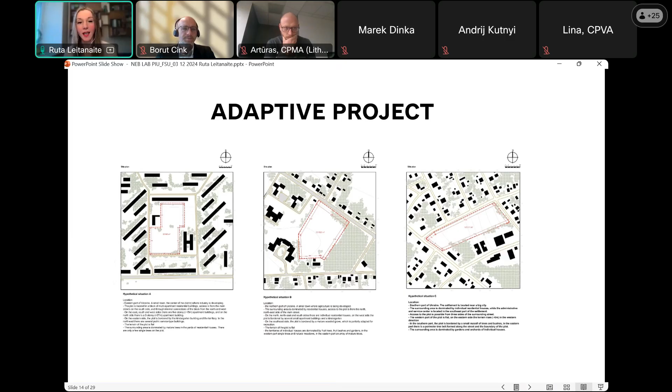We thought of a new concept, which is an adaptive project. What does adaptive project mean? It's a project of architectural spaces and construction that has its own identity and its own solutions, but it could be adapted according to the local urban context, the local natural context, and community needs. In the competition, we asked each participant to come up with solutions for 3 theoretical plots in Ukraine so that we could see how those systems could adapt. And we got those solutions. The architects had really good imagination, and some of the projects were perfectly transformable.

The third challenge is mostly related to the European Union legislative basis, which is public procurement. This competition was to be announced as a public procurement, and we had certain challenges organizing an architectural competition while selecting the best work according to architectural and quality criteria. So we managed that too.

Last week, we had the awards for Most Efficient Public Procurement in Lithuania, organized by the Ministry of Economy and Innovation, and our project was awarded the winner in the category of Smartest Public Procurement. This is, I have to say, the first time an architectural competition is acknowledged by bureaucrats. So when architects say it's not possible to combine public procurement with an architectural competition, I would say - but there was one case awarded.

So now diving into the competition, we announced the Open International Architectural Competition with top 3 projects awarded, and the winner received a contract to design the technical design. As for the inclusion of Ukrainians in this stage, we had a requirement that each team in the competition had to have at least one architect with the right to provide architectural service in Ukraine, and at least one architect with the right to provide architectural service abroad.

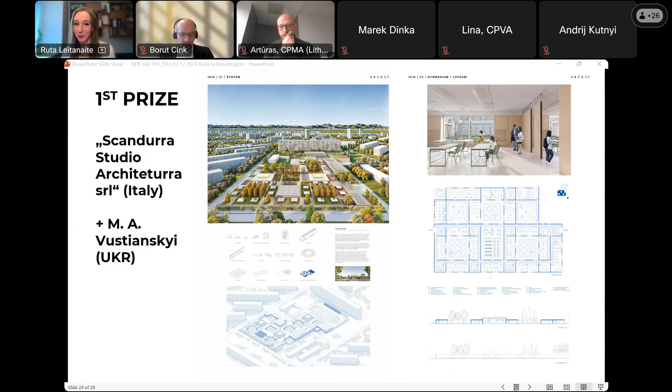So today we will get three presentations from the first prize winners. You will get that in detail, so I will not linger on it - just show you some pictures of how they look.

So what's next? The contract is already signed with the winners. We expect to get the technical design in spring 2025. And as you may know, a huge Ukraine recovery conference will happen in Rome in 2025, so we hope for some promises to be made regarding the implementation of this pilot project as well. Just for you to get the idea where we are now.

This is the scheme that my colleague, architect Rokas Kaičiauskas, who was writing the competition brief, drafted for this initiative. The competition ended, the contract is signed, and we are here where the red line is. There's still a way to go until the implementation. So we just passed the ball to our colleagues at Central Project Management Agency.

Good luck with finding donors. We will do everything to spread the news, not only about the first prize, but also about the second and third prize. Hopefully this project gets implemented until 2026. So thank you a lot for the time. And now I pass the word back to Borut.

Thank you very much, Ruta, for this very concise and succinct overview of first the idea and then the implementation of the project. The next session we planned together with Ruta to give also the voice to national authorities and the European Commission, who are either directly involved in the implementation of the project or are accompanying it. So I would like to invite first Artūras Žarnovskis, Co-Create Future of Ukraine Program Manager at Central Project Management Agency of Lithuania, to take the floor and reflect on this past experience. Artūras, you were also very much involved in day-to-day activities, so we are super interested to hear how the project turned out from your personal view and the view of the Lithuanian government and other institutions.

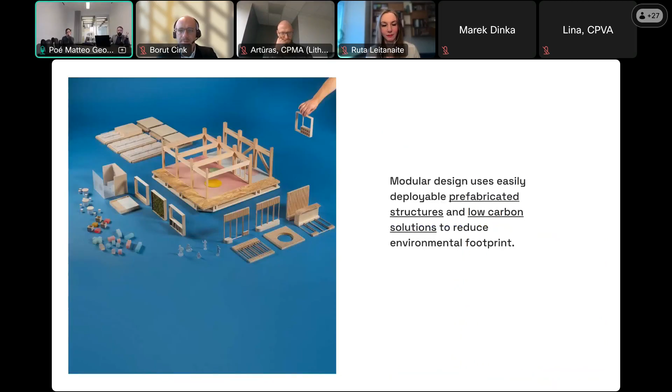The system is a flexible, prefabricated, load-bearing wall system that can be arranged in different ways. Every unit is energetically autonomous, which helps with low-carbon approaches to reduce the footprint of the building itself. So we can resume three main concepts in the project: flexibility, sense of community, and sustainability.

This is a bird's-eye view of the project, and now I will go a little deeper into the description of how the system was thought out.

When we started to think about the project, the first thing was the analysis, and one of the main ideas of the competition was to build schools all over Ukraine. So the first thing to understand was the best transportation means to build the school. We found that the best way was to use common lorries, so we thought about the basic element of the project, the prefabricated wall, being a module sized to optimize the space used in a common lorry.

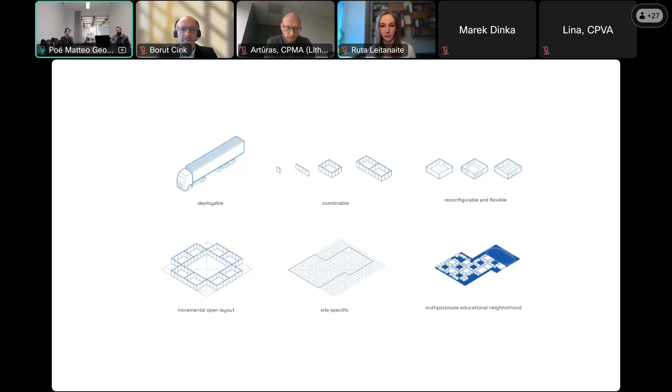These walls are assembled into single units, the classrooms, and these classrooms are arranged around a void, forming a courtyard. This way we have a system, and then the system is spread all over the plot, following a grid of rules, both programmatical and humanistic, because we want to create these relational spaces that are very important for our project. So this is the result on the land plot.

And as was mentioned, we were asked to test our project on other sites, and these are the two other sites that we were asked to develop.

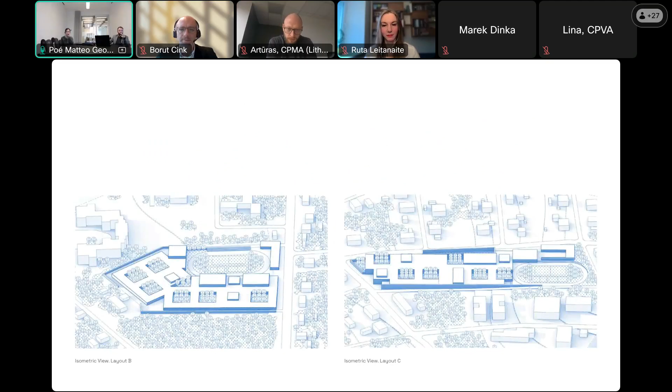When we started to design the building, actually we started to design the void, because we don't see the void as a mere interstice between buildings, but as something that can bring value to the project. The void is the key element that helps create an environment promoting learning, well-being, and social interaction.

The courtyards and the gardens, the recreational areas, are true spatial aggregators that make it possible for students to stay together. They are places of experience, places of nature, places of wonder, and places of learning.

The transparent layout of the building towards these courtyards helps natural light and natural air come in. This helps in creating mental and physical health, improving attention, focus, and cognitive ability, and it also helps synchronize the body's internal clock.

This is why when we thought about the artificial light, we used a DALI system, which is self-regulating depending on the brightness of the natural light on one hand, but on the other hand it changes its temperature depending on the rise and fall of the daylight, in order to keep our body synchronized with the circadian rhythms.

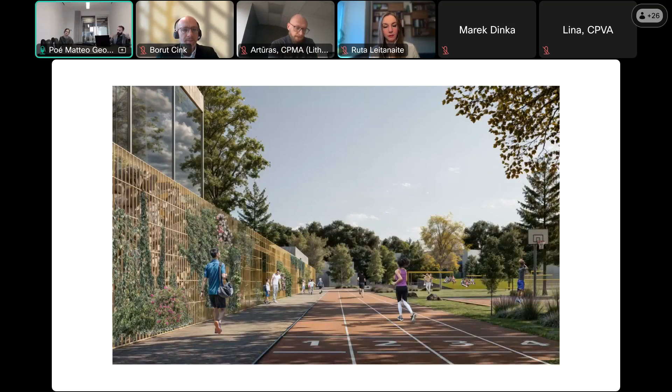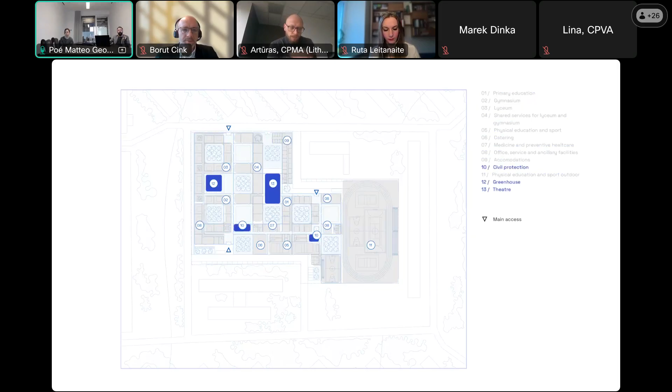We also had a program, and I'll go through it quickly because we have quite common school functions. But what's interesting for us is how all these functions actually face the courtyards, relating to each other and creating this connection between people and all the users in the schools. The result is a very porous plan where people can move and meet freely.

The same was true for the fluxes. We differentiated the fluxes at the entrance, but once you are inside, fluxes and people can actually meet and interact.

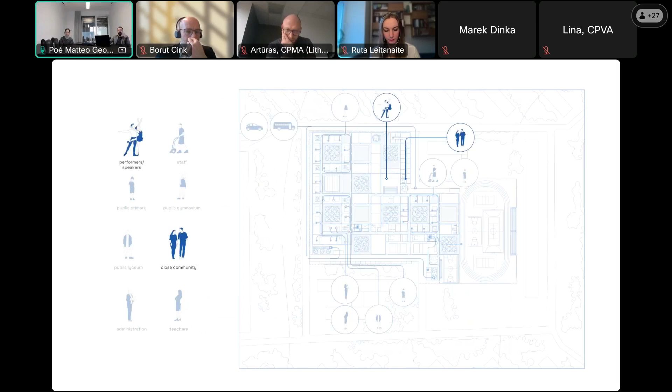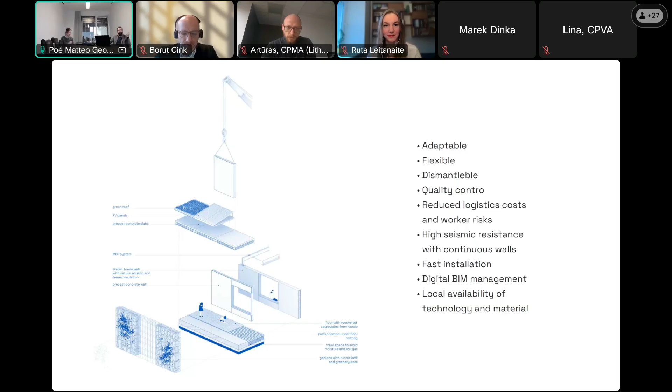A little deeper in the structure, the walls are made of two layers: one structural layer and one for insulation. In the insulation layer we had the system integrated, and the same happens for the roof and floor. We have radiant panels on the floor, PV panels on the roof, and a green roof. Everything is dry assembled except for the foundations and the shelter, because there is a shelter, of course. And then all around we have this iconic facade.

When we speak about sustainability, we need to understand that sustainability is not only environmental sustainability, but also sustainability for people.

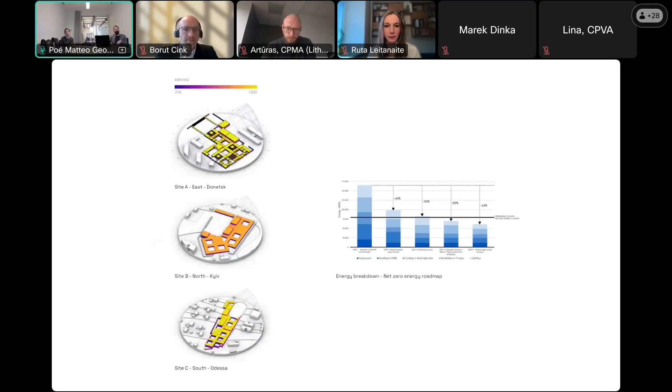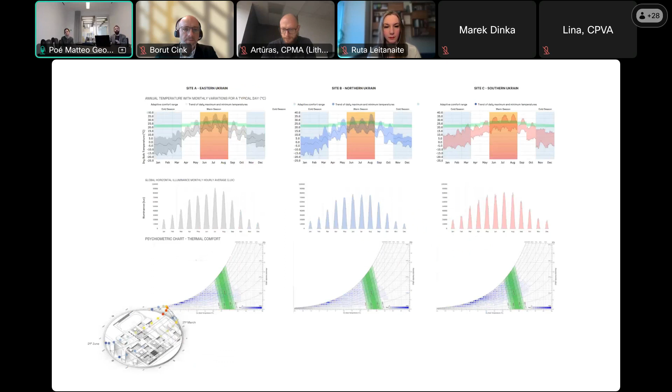From the environmental point of view, we wanted to reach a zero carbon school. So we followed the rules of the NSH and NZEB criteria to find the correct strategies to reduce our footprint. Everything starts from analysis: we analyzed the needs of energy, temperature, daylight exposure, noise, winds — all kinds of analysis that helped us find the correct and most efficient solutions to reduce our footprint.

The result is a complex system of solutions like PV panels, dimmable lights, CO2 sensors, water collection, permeable surfaces, and high albedo pavements. All these solutions help reduce the footprint of the building on one side.

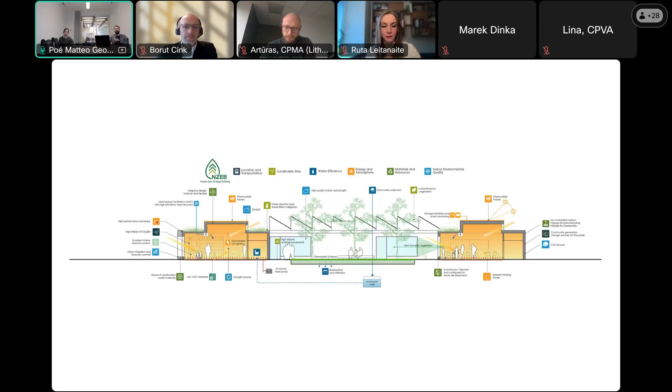On the other side, it's important that the building is sustainable for people too. So we have a lot of solutions that help increase the internal comfort for people: mechanical ventilation, the DALI system adapting the lightness inside, the radiant panels, and the vegetation outside, which helps people use the outdoor spaces, because we wanted people to use the outdoor spaces for most of the time.

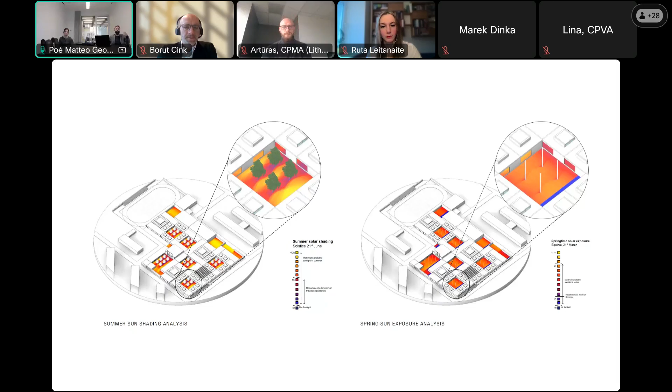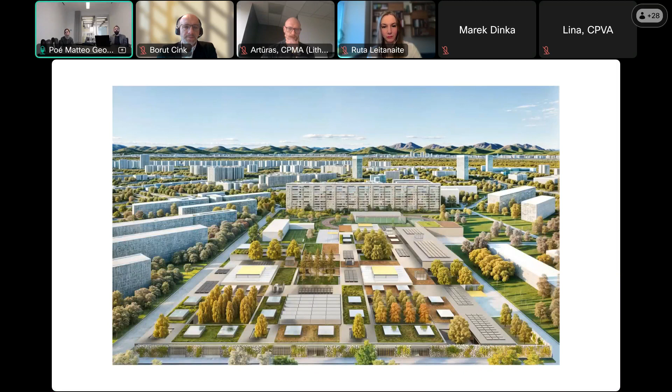I would like to finish the presentation with a hope. We designed a modular system that is actually flexible, and we know that the needs of people, of society, of education, of Ukraine will change. We hope that this project, being adaptable, will adapt to the changing needs of society and of all the stakeholders involved, both in Ukraine and why not also abroad.

So, as a catalyst for positive change, Neighborhood for Educational Wonder offers a beacon of hope for future generations striving to create thriving, resilient communities. Thank you very much.

Super inspiring. Well, Ruta, I invite you to join the conversation. You have some questions for Poe and his team, I think. Thank you, Borut and Poe Matteo George. Very happy to meet you again. We have had some conversations before, but I will start with this one.

As I explained in my presentation, we as the competition organizers and the authors of the competition brief came to different challenges which were very specific for this competition. But you, as the participant, what were the biggest challenges for you to solve with this project?

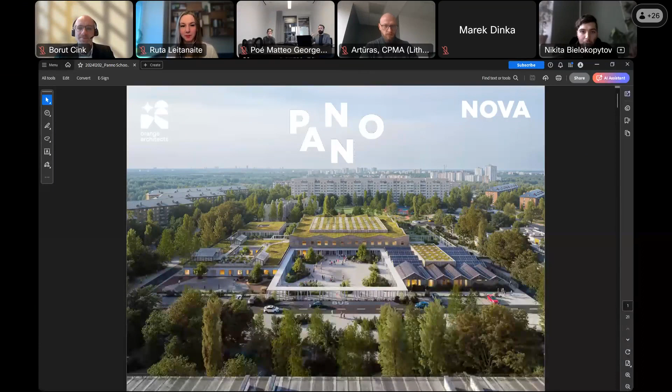Good day, everyone. I will just share my screen in a second. Today, I'm not the only one from our team who is present. Also, Elena is here, but she will join when we speak of the questions.

So yeah, this is the overview of our project, the bird view. We participated together with our partners from the Netherlands. We are a young Ukrainian architectural office who actually appeared after the full-scale invasion, and we participated with our great partners from the Netherlands, from Rotterdam, Orange Architects.

The main idea of our project can be described in one sentence: the school should teach the children in every element. So each element of the school should be a learning experience that will affect the children's future, from any boring one to any active one. So everything should be somehow teaching you.

When you come further to the architectural concept, how you can invest this and how you can use this, you have three main elements. You have the function, which you can find in the technical brief of the competition - which functions should be there, how many children, who should study there, in which grades, how many classes, etc. Then, if you combine this with the philosophy of world we value, which is used by our partners from the Netherlands, and I think also developed by them.

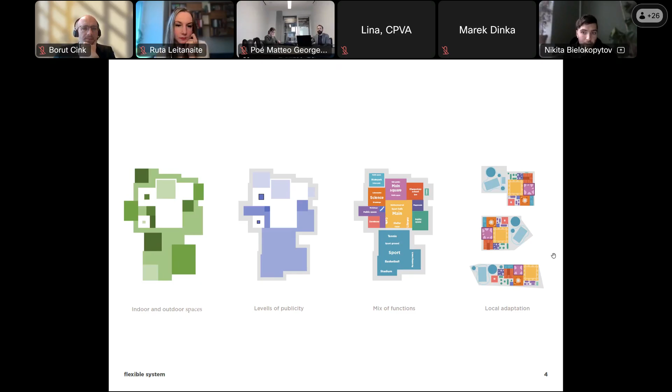And if you combine all of this, and like we all know the task for the competition, it should be local and adaptable. So we used three hypothetical plots for trying to fit our intentions, to work out the systems, how it can be worked and used in different scenarios.

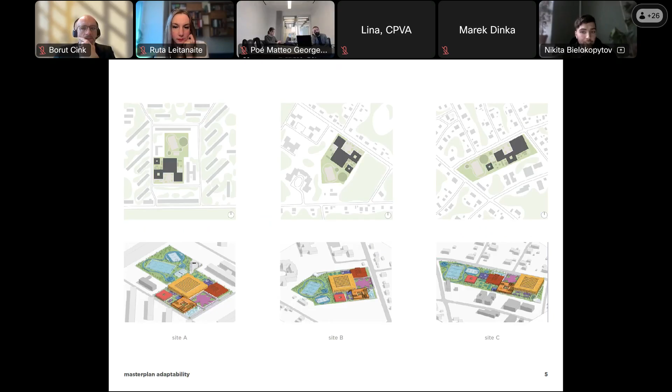And we came up with such a library, you can say, of structures that you can use or should be used in a project, each project, but they can differ in form. So they can evolve, but this is the basic idea or the core structure of the project.

So on the left, you have the buildings. In the middle, you have the courtyards, which are more semi-public spaces that also have a function. And on the right, you have a completely natural feeling and completely natural structures.

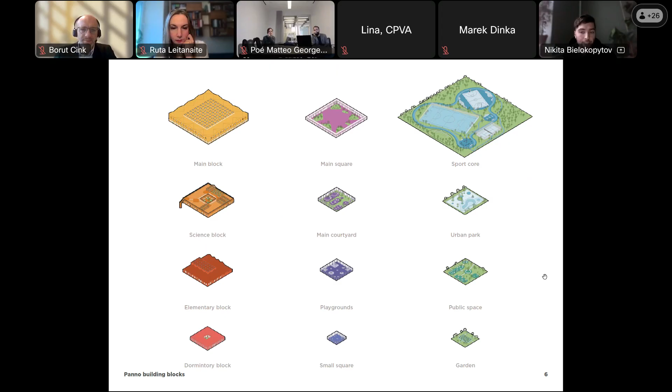We also tried to establish for ourselves some rules or patterns which we think should be in a school, so that each time you implement a new school in a new place, in a new area, in a new neighborhood, you can control yourself. It's like the rules that each school should have these qualities.

And again, depending on the task and the location, it may differ a little bit, but not the principal one.

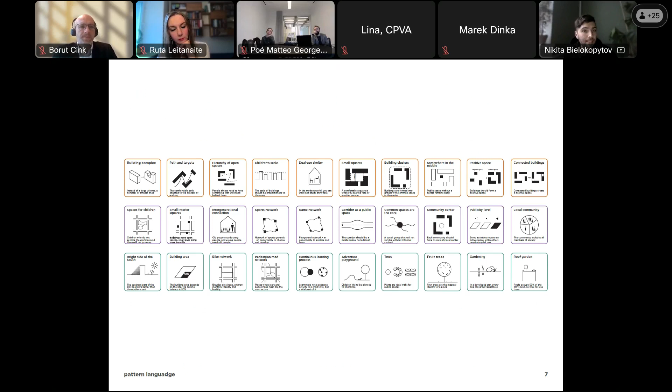Again, we worked a lot on adaptation, both in terms of architecture and visual style of the buildings. For us it was one of the main aspects, because we're from Ukraine and didn't want it to be like in Soviet times, all the same across the whole country.

So we tried to engage and implement Ukrainian traditions into the design facades. We imagined each of the three lots was in a different location. For example, one was in the north of Ukraine, where there's a lot of forest, that's why there is wood material.

The other one was more on the east part, where there are more rivers, so there's a lot of brick, and again a lot of destruction, so it can be reusable bricks from previously destroyed buildings.

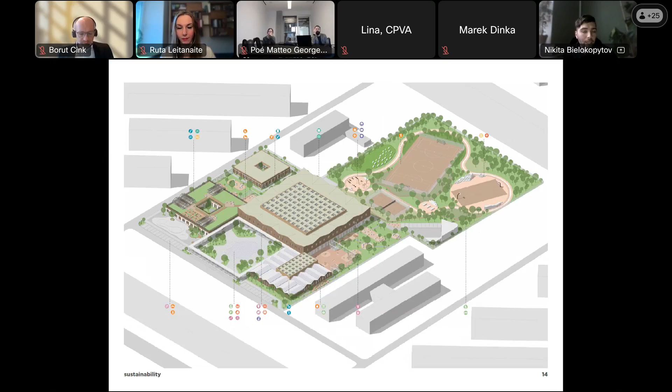And the third one we imagined on the south, with its historical value of different plaster textures, colors, and details. And that's how we ensured that working with all of these principles in the project, you can achieve not ideal differentiation for each project, but something really adaptable that can differ.

We can talk about the project a lot, it has a lot of things in it. For example, we also thought about the idea of participation, that when the school will be built, you can go directly to the future director of the school, the future children, the future community, and together with them participate in the idea of establishing the school.

So it may differ a lot, or it may differ a little, but the outcome will change. For example, what kind of facade do you want? What kind of spaces do you imagine you need? The orientation of the school, do you prefer more open spaces or more closed ones?

We try to establish it in such a way that you can make each school really different, but it's still one school at the end, and the project is not unique in each way, but it can be adaptable.

We thought about sustainability. We also included a lot of ideas about sustainability, about value, about comfort, about health, about the social aspect.

And this is what we get: schools that we think may be suitable for different Ukrainian communities, different Ukrainian cities, different Ukrainian regions, and different Ukrainian contexts.

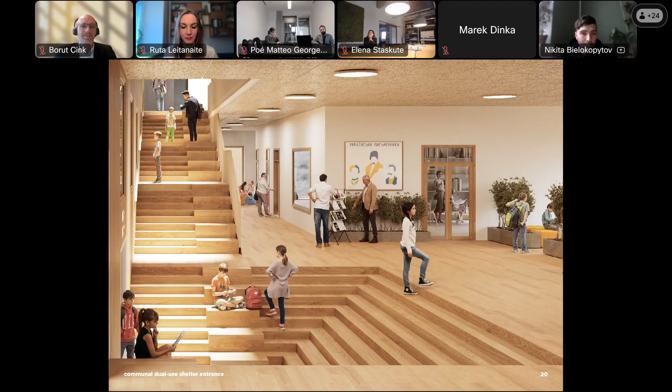One thing I also want to mention: this is the entrance to the dual-use shelter, but actually it's not a separate entrance, it's part of the school. It's just another way of passing through the school, going through other classes located in the shelter, and you naturally pass them by. It's another level of the school, more underground, more protected, but still accessible and open, which is what Ukrainians need right now, because in the future there will be a question of how to use shelters more commonly for Ukrainian schools. We only had 5 minutes to present, so that's it.

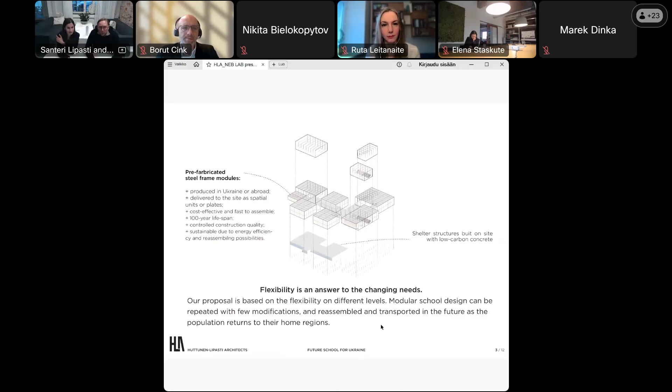Architecturally, the schools consist of separate blocks or clusters that can be grouped in a flexible way on different sites, including different programs according to need. All the blocks are technically independent, so they can be added or removed and used easily. The blocks are connected with lobby spaces that function as internal streets and multi-purpose spaces, part of the everyday school spaces.

While the load-bearing elements are prefabricated, the secondary construction parts can be built on site from local recycled or new materials with local labor, and the shape of the roofs, facades, and materials can be chosen to fit the location, so it's very adaptable to the environment — it doesn't always look the same, it just has the same element sizes and logic. In the usage of the building rubble, we would like to avoid the presence of a clear war image, as we want to look forward and hope that the war for Ukraine will soon be only history.

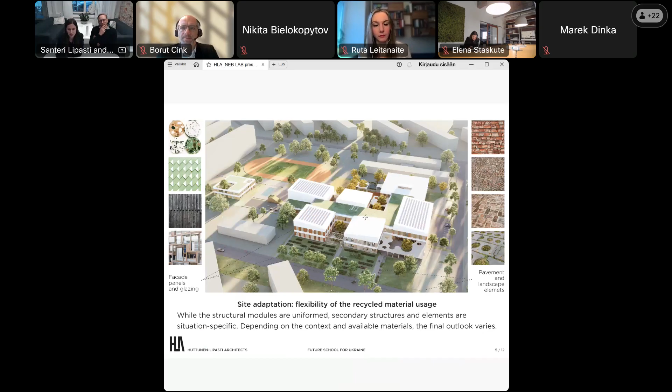In the internal organization of the school, we emphasize clarity and a gradual transition from open social functions to a more undisturbed learning environment. This is achieved by placing shared social facilities such as the library, art studios, workshop, event hall, sports halls, and canteen on the ground floor, while classrooms are primarily located upstairs. We believe it's very important for the 24/7 school to have this merge, but also a clear distinction between the functions.

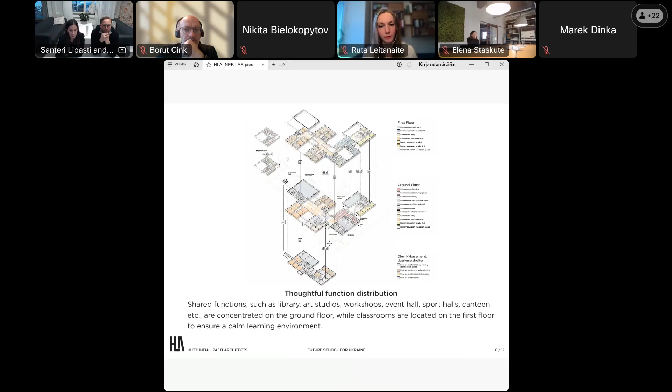The dual-use shelter repeats the footprint of the main sports hall and workshop cluster, allowing activities to continue seamlessly. The lobby serves as an internal street, featuring a series of public spaces that connect the functional clusters and atrium-like courtyards, creating synergy between them.

The classrooms can be closed off to allow formal education, or opened up to the lobby and joined together to allow informal education. In this way, it's a flexible learning environment that adapts to the evolving concept of education. Since we know Ukraine is also open and working on reform of education, we believe it's very important to suggest architecture that can be flexible for different concepts of learning.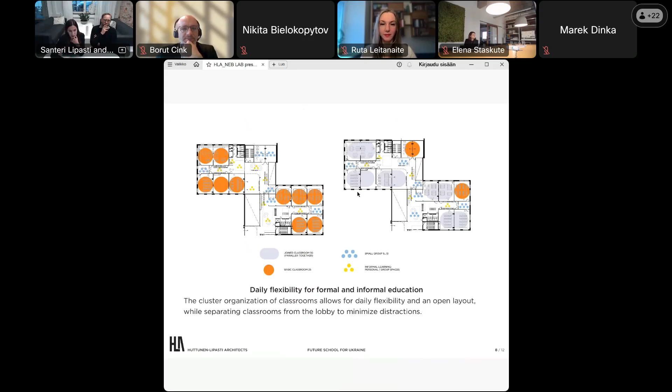The lobby acts as a truly public space where multiple scenarios and spontaneous interaction occur. Navigation within the school is intuitive due to visual connections and a visual coding of the clusters. The interior showcases a variety of creatively used recycled materials.

And now, finally, the dual-use shelter. As we know, it's an important subject. It's been designed in accordance with the latest Ukrainian legislation, which requires 100% capacity during air raids. However, we wanted to ensure that the shelter spaces are not merely functional, but also comfortable and integral to the daily learning process.

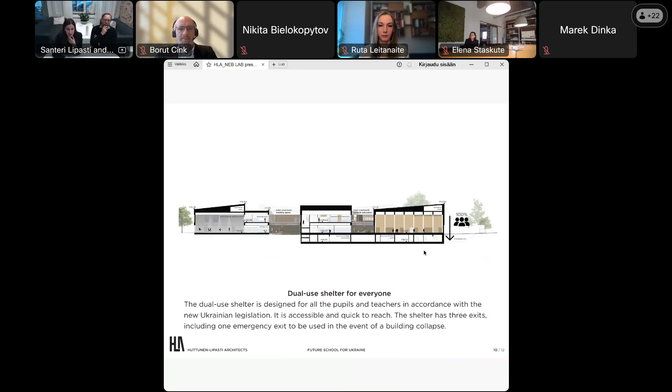This is why sport, performance, and workshop activities—those that don't necessarily require natural light but benefit from improved acoustics—continue in the shelter. We suggest placing, for instance, dance and fitness halls, as well as green screen studios, that are easily adaptable with alternative layouts for almost uninterrupted learning during air raids.

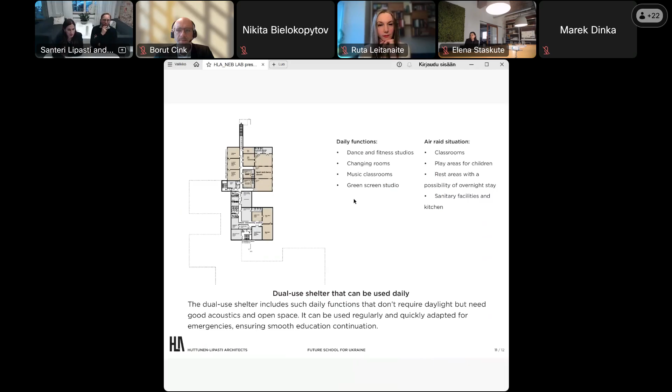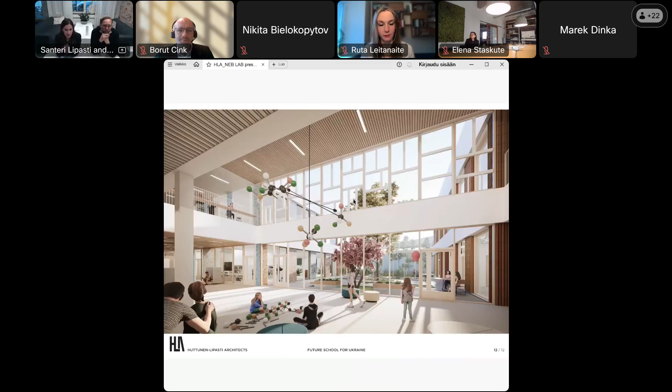With this, we hope the Future School for Ukraine will be an inspiring place for both pupils and the local community, where learning takes multiple forms. Thank you for your attention.